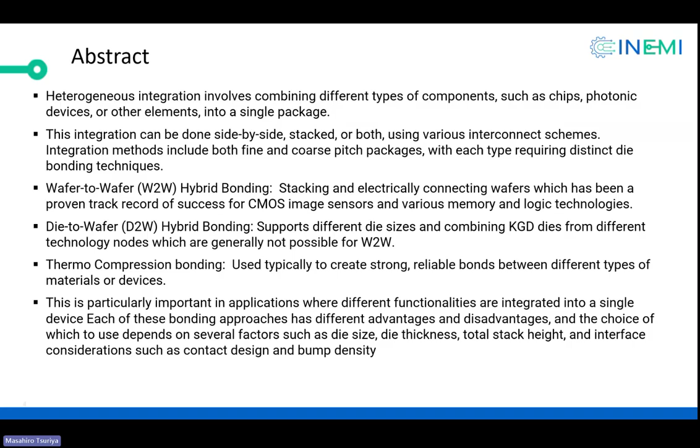Abstract: heterogeneous integration can be achieved through side-by-side, stacked, or hybrid configurations utilizing various interconnect schemes. This method encompasses both fine and coarse pitch packages, each requiring specific die bonding techniques, including wafer-to-wafer and die-to-wafer thermal compression bonding. This topic is particularly relevant for applications that integrate multiple functionalities into a single device. Here we discuss these bonding techniques, highlighting the advantages, disadvantages, and the factors influencing the choice of method.

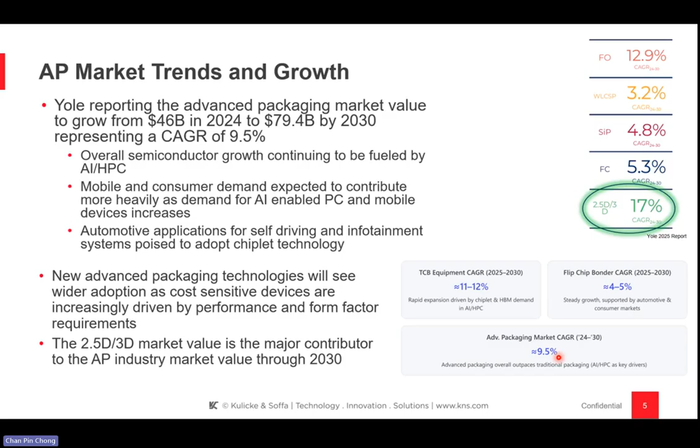There's big growth in 2.5D and 3D packaging, close to 17%. Let's focus on the bottom right, the TCB equipment, thermal compression bonding. Remember, today's topic is about bonding. It's growing at a CAGR of about 11 to 12% between this year and 2030. Flip chip bonding with mass reflow is growing about 4 to 5%. Overall, averaging the three segments of the market including hybrid bonding, it's growing at close to 10%, about 9.5%. Let's talk about the three major bonding technologies.

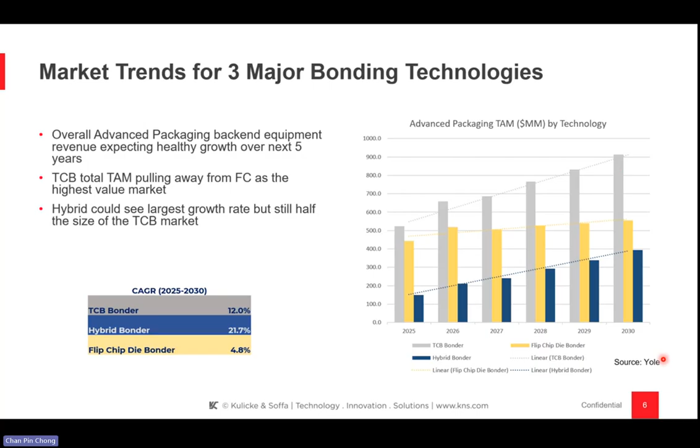Let's talk about the transition of technologies from flip chip to TCB. Thermal compression bonding and flip chip bonding are both very critical to die attach technology in semiconductor packaging. Flip chip, while still indispensable for many mainstream, cost-sensitive applications, is a very mature technology that's also plateauing. However, TCB right now is riding on the AI HPC, high performance computing market segment.

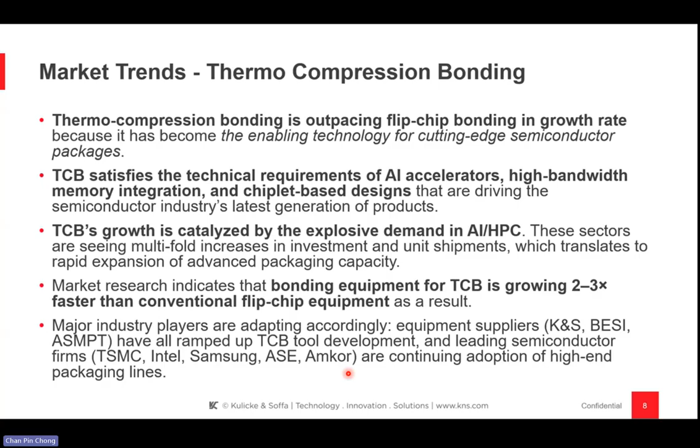So the major equipment suppliers, K&S, BESI, and ASMPT, have all ramped up their TCB development, and leading semiconductor firms like TSMC, Intel, Samsung, ASE, Amkor—just to name a few—are all adopting thermal compression bonding as the requirements for AI and HPC continue to grow.

Okay, so then we talk about the next phase of hybrid bonding. Hybrid bonding and thermal compression represent two generations of advanced die attach technologies. Hybrid bonding achieves bumpless connections - there's no bumps. It's direct copper to copper at sub 10 micron pitches.

But some of this could have been challenges if TCB continues to get smaller pitches, and hybrid bonding could be focusing on even finer pitches like sub 5 microns. This enables ultra high interconnect density for 3D integrated chips. TCB typically uses solder or copper microbumps with heat and pressure - the key thing here is heat and pressure.

Reliably bonding dies at fine pitch - today the market is around 20 to 40 microns pitch with high yields, while hybrid bonding is viewed as a longer-term solution for higher density and even finer pitch for heterogeneous integration. But there are also other challenges with hybrid bonding, which I will explain a little later. Hybrid bonding tools have also a smaller market right now, but it's growing very fast, from 152 million, growing at close to a 20% CAGR rate.

TCB, thermal compression bonding, is the workhorse of the current generation, and advances in TCB technology such as fluxless bonding and even direct copper-to-copper bonding is now suggesting pitch capability down to 10 microns, thus potentially extending TCB applications typically reserved for hybrid bond.

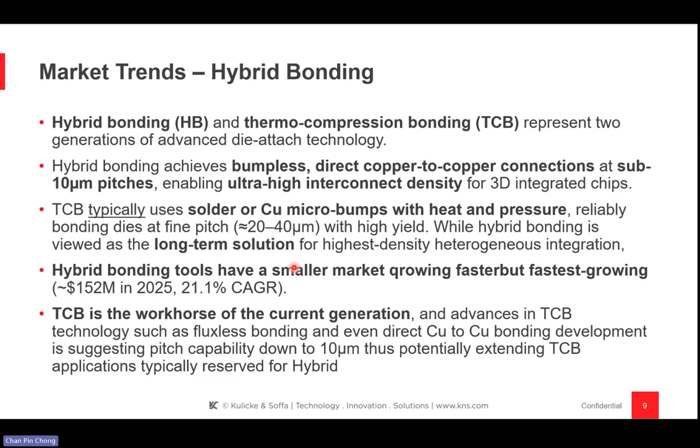So we would discuss some of this in the subsequent slides between the difference between hybrid bonding versus thermal compression bonding, because thermal compression bonding is the workhorse right now for most devices at 20 to 40 microns. As the pitch gets down to sub 10 microns, there'll be a mix between TCB versus hybrid bonding, depending on the package type, package density, package height, and a lot of different applications.

Hybrid bonding has higher interconnect density, allowing interconnections under 10 microns, improving speed and reducing latencies. It has better electrical performance since we're eliminating the solder, making it a direct copper bond, which lowers the resistance and power use and speeds up data transfer - so speed, power, and lower resistance.

It improves overall thermal management, eliminating bulky materials and enhancing heat dissipation for higher power usages. It's true 3D integration and enables real 3D stacking, saving space and improving performance. As package and dies get thinner, and packages stack up more, scalability is very key - that's why it supports various chip types and processes, ideal for modular chiplet designs.

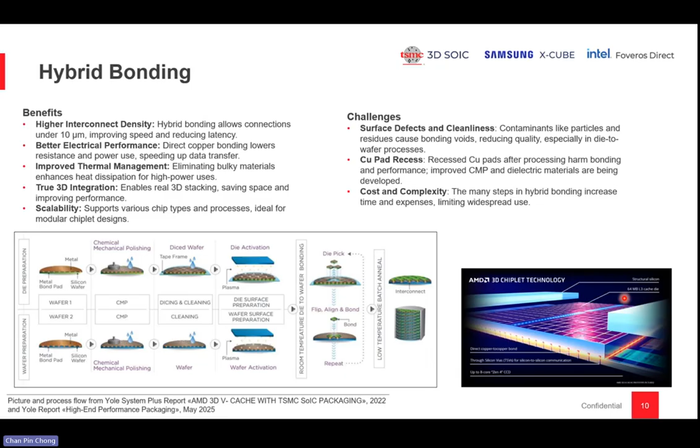Whereas in the OSAT environment, where you're taking in different die sources, dielets, or chiplets from different sources, there's a lot of unknowns because you don't have control of the upstream wafer process. Things are improving, but there are still integration challenges the OSATs or back-end advanced packaging facilities need to deal with for incoming dielets or chiplets from different sources, especially with heterogeneous integration combining multiple chip packages in a single package during die-to-wafer bonding. This is a picture from one of the AMD slides shown at some conferences.

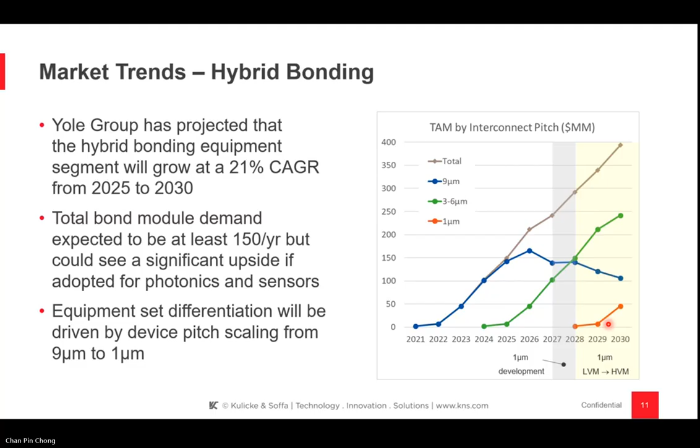Now we move back to the TCB fluxless capability. K&S has developed a fluxless, in situ formic acid thermal compression bonding process. We have over 200 advanced packaging tools delivered, with over 50 equipped with formic acid fluxless capability in high volume manufacturing.

Formic acid fluxless capability is fully developed in-house by K&S and is the only mass production fluxless TCB in production globally today. The major advantage over alternative technologies is in situ oxide removal, which removes the risk of reoxidation. Being in situ means that as you bond, formic acid is introduced, so you're cleaning and bonding at the same time to reduce reoxidation risk, especially on the copper surface. There's no damage to the sensitive device since it's a chemical cleaning process. Formic acid has been used in the industry for many years as a known cleaning process, and we're introducing it as an in situ formic acid TCB flow.

This creates a wide process window, as we can see that quite a lot of equipment is already in high volume manufacturing production. We've done this over the last couple of years working with different customers, and this is a proven technology in production.

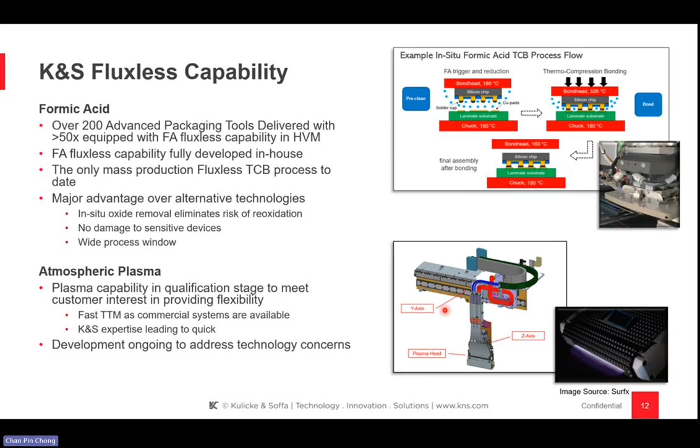Of course, every integration has challenges. As we introduce this technology, we continue to address technology concerns. But this is already in production and in different stages of qualification, and we believe qualification of plasma and formic acid in production will be completed very quickly.

When we introduce formic acid, we believe we have a wide process window. When we introduce hydrogen-based plasma, it effectively removes some of the tin oxide from the tin surface. With the addition of both formic acid vapor and plasma, it clears the top layer, letting the formic acid remove deeper oxide. Formic acid vapor overcomes some of the plasma's directional limits, cleaning hard-to-reach areas. That's why we believe the two are complementary - combining plasma scans with shorter formic acid exposure gives a very nice clean bond. This sequence also reduces formate byproducts and prevents voids in the solder.

Here it shows a formic acid exposure process with an 11-second formic acid exposure, and we measure the bond force after the melt.

Okay, this is about negative 2.1. So the lower it is, the better.

For the plasma-only process, you have a 3.1 second plasma exposure on both the source as well as the target wafer, and here it's about 0.2 newtons.

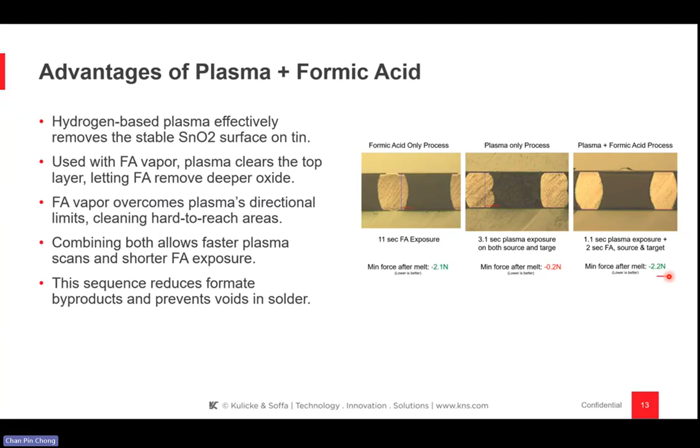If you look at the combination of both plasma and formic acid process, it reduces from 11 seconds or 3.1 seconds to a 1.1 second plasma exposure and a 2-second formic acid exposure for both source and target, creating close to a 3.1 second total exposure time for both plasma and formic acid, and also a good force after melt at 2.2 newtons. So these are some of the experiments showing the complementary effect of plasma and formic acid in the fluxless bonding process.

All right, so let's talk about the KNS technology roadmap.

Chanpin, just to let you know, Professor Iyer is online now. Oh, thank you, I was trying to text him while talking. All right, so you got him. Thank you, Subu, thanks for joining. No, I was unable to get my mic to work when you were trying to introduce me, but that's okay. Everything's good. Okay, good, thank you. All right, a couple more slides and it'll be your turn.

All right, so KNS technology roadmap, large format. You can go to YouTube, Google, all kinds of co-pilots, and see CoWoS capability scaling: large chiplets surrounded by HBM memory dies, and you can see these modules are getting bigger.

So KNS is basically aligning our roadmaps to CoWoS and EMIB scalability to large format. Large format could be large die or large substrates, going up to about 150 millimeter interposer packages on substrates, to meet the bonding needs for both RDL panels and quarter panels. 310 by 310 looks like the most imminent one coming up soon, and of course going even bigger as the scalability of the roadmap increases for AI and HPC computing.

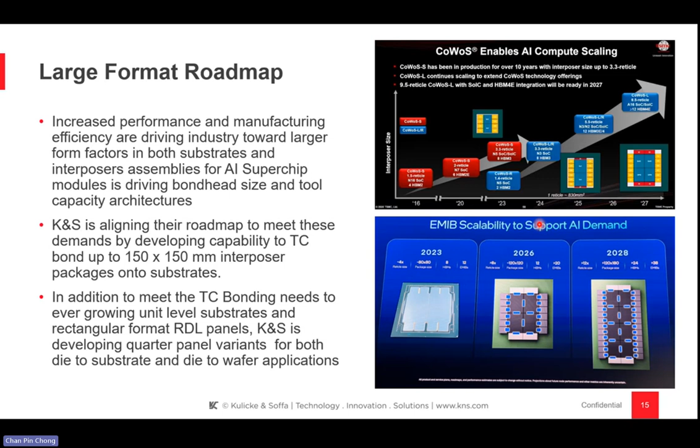So people are moving towards a panel, and I think the first step will be a quarter size panel, followed by the larger panel later on in later years. But KNS is focused on addressing those roadmaps in both the CoWoS and EMIB scalability.

Let's talk a quick few slides on copper, and then I'll introduce Professor Subu. This is an alternative to hybrid bonding. I mentioned a lot about the 10-micron node where people are adopting hybrid bonding, but KNS has also developed a capability using fluxless copper-to-copper TCB. It's the same equipment set, with formic acid delivery hardware used for solder extended to solderless copper-to-copper. Discussions will cover copper-to-copper TCB surface prep, process options and examples.

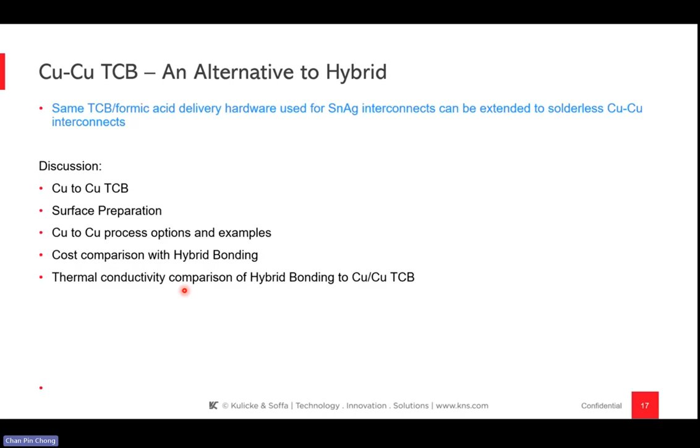And then, of course, we have cost comparisons with hybrid bonding. It's a much more competitive solution, and you can continue to push the scalability of the node down to sub 10 microns. Professor Subu will talk about some of that. We also have a thermal conductivity comparison of hybrid bonding to copper-to-copper TCB.

So the prep: CMP. Here basically you have a copper pillar, 1 to 100 nanometer range, with copper oxide layers. You apply force and heat to create a flat surface and initiate diffusion. So the way it bonds is basically diffusion, with temperature and force, about 50 megapascals. And you can see the deformations and the copper oxide reduction.

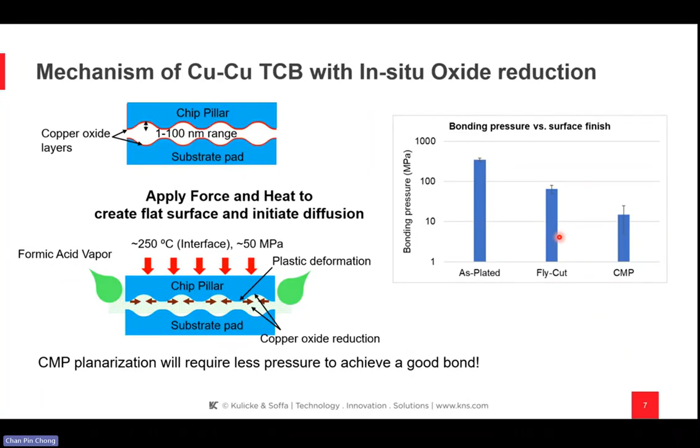And of course, when you do a CMP planarization, it creates a much flatter surface, and the bonding pressure is lesser here, about 10 megapascals compared to as-plated versus fly-cut. So the CMP process is recommended to get towards a flatter surface, and then you can apply heat and force where diffusion happens between the two copper surfaces. We have done a couple of different approaches to this, and Professor Subu will talk about how we do the copper pillar with the ALD passivation.

You can see a little bit of protrusion here. All right, here we have a pre-applied underfill organic, in collaboration with Resonac. We have a tool in the US joint facility working on these collaborations on the pre-applied underfill organic materials. And we also have customers in Asia using an inorganic dielectric bonding.

You can see the whole process between the ALD passivations with the pre-applied organic underfill versus the inorganic dielectric. And here, when the cooling happens, you can see where the diffusion of the copper-to-copper interface happens, right? This one has an underfill material, and this is basically an ALD passivation.

And this is in collaboration with UCLA. We have our tools in UCLA working closely with Professor Subu and his team. We've got great work, great results coming up. And we've been presenting this in ECTC conferences, as well as the IMAPS conference actually happening today in San Diego.

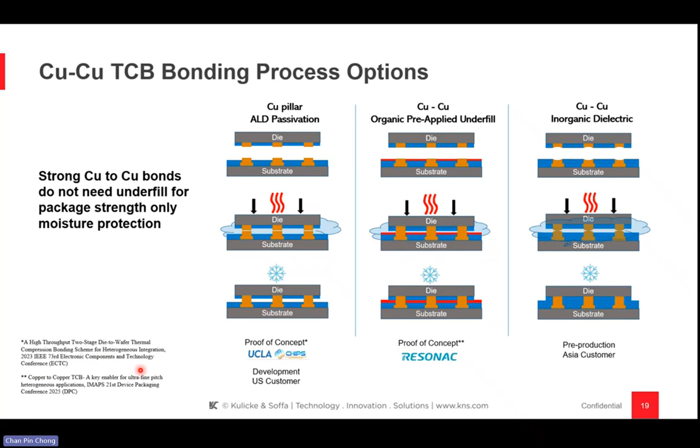All right, so this is the pre-apply. I'll explain a little bit about this pre-apply underfill. This is basically the Resonac process, a spin-coated application process. It's a bump wafer: you apply a resin and partially cure it, CMP process, and then you dice it.

The die size here is about 5 millimeters, 20 micron pitch, copper pillar height about 5 microns, and then we have a 0.5 nanometer CMP after finish. We apply an underfill thickness of about 4 microns, and then we do a little bit of a protrusion of 30 nanometers, and then we anneal for about 2 hours at 250 after bonding.

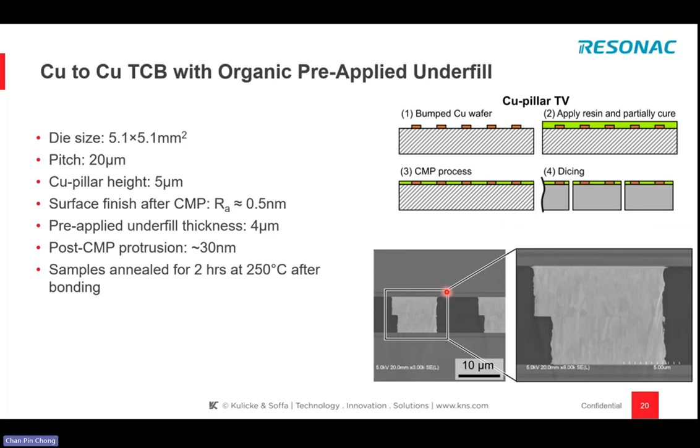So this is one of the methods which I mentioned - this is method number 2. And this is what we've done. And here you can see that after the anneal process, pillars show grain growth, okay? And the wavy surface is a good confirmation of the good joint between the two surfaces of copper. There's no signs of any degradation after the annealing.

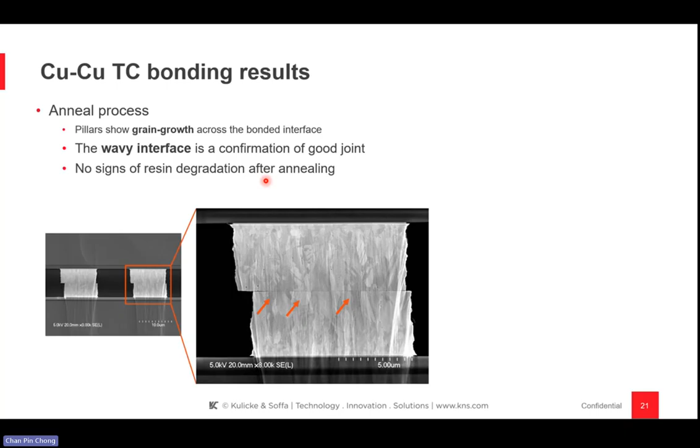So this experiment works quite well, and we'll continue to do more DOE experiments on getting a better process window on that. Okay, so in summary, I'd like to mention that the AP/HI growth in advanced packaging is really experiencing rapid expansion, propelled by AI, HPC, 5G, 6G, automotive, IoT, growing approximately 10% and reaching about 79 billion by 2030.

Bonding technologies - thermal compression bonding is surpassing flip chip bonding in adoption, due to the compatibility with applications of AI, HPC, and chiplet architectures. While hybrid bonding provides high density, it involves much greater complexity, like I mentioned. Today it's a much smaller market, more niche, but it is growing, especially as the node

gets to smaller pitch. KNS solutions - KNS TCB supports the sub-40 micron pitch processes, demonstrating maturity for the tin and copper bonding in high volume scenarios.

And then we are also in mass production on the fluxless process in different sites globally, utilizing the formic acid process. This is a big enabler to the robust packaging solutions for larger die sizes, exceeding the reticle sizes, like I showed you in the roadmap for both CoWoS and EMIB growing. And today the pitches are about less than 20 microns, and we believe we can scale down even sub-10 microns with the TCB fluxless formic acid process.

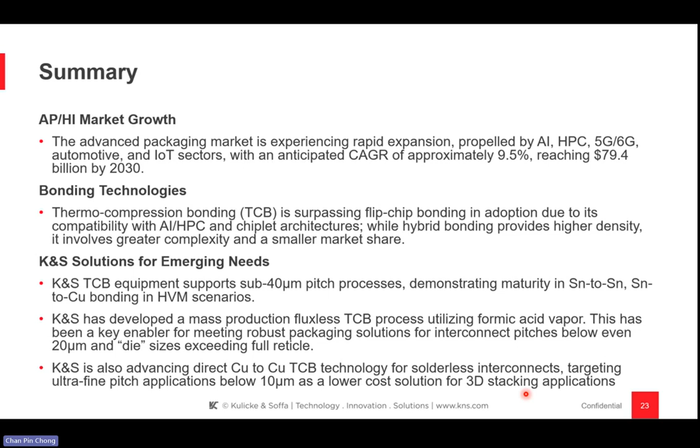And this nicely leads to Professor Subbu's introduction of thermal compression for chiplet-based systems. I hand the time over to you, Professor Subbu, and thank you for good years of cooperation working with you at UCLA labs, and we look forward to even more collaboration as we continue to scale our TCB to finer nodes.

Thank you, Chan Pin. I'll tell you to advance the slides since I think you're still controlling them, right? Correct, so let's go to the next chart.

First of all, we're very grateful for this long-term, sustained, deep collaboration with KNS. I think we benefited a lot, and I believe the industry will benefit tremendously from this collaboration. As Chan Pin mentioned, TCB is the workhorse for chiplet and dielet assembly today, representing the largest incumbent base of advanced packaging assembly. All CoWoS, all 3D stacked memory, HBM, HMC, and EMIB employ solder-based thermal compression bonding almost exclusively, and yields well in high volume manufacturing down to 36 micron bond pitch for both interposers and 3D stacking.

Now, extending TCB to finer pitches requires the elimination of solder to avoid complete intermetallic formation and the problem of solder extrusion, which leads to shorting and other reliability issues as you try to make the pitch shorter. So the key thing is to see how we can eliminate solder and do copper-to-copper bonding.

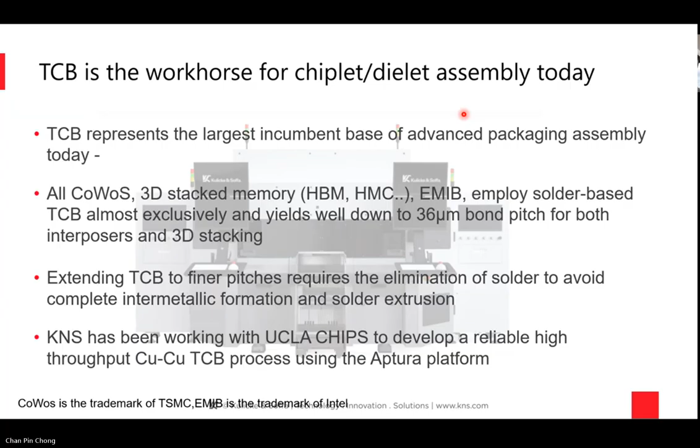We've been working with KNS to develop a reliable, high throughput copper-to-copper TCB process. We started with what's called the Apama platform, and now we're moving over to the Aptura platform, their latest technology, which you can see in the background there. We just took delivery of an Aptura machine, which will be fantastic. We also offer this as an application service for people interested in making copper-to-copper TCB.

Yeah, so why don't we just skip the animations? Otherwise we'll go back.

So the problems of fine pitch solder are bridging and brittle intermetallic. If you reduce the amount of solder, you won't have these extrusions, shown in the left-hand micrograph there. But what happens when you reduce the amount is all the solder gets converted to intermetallic. This intermetallic is extremely brittle, and it reaches the point where the bonds are not very reliable. So the whole idea is how do we eliminate solder completely?

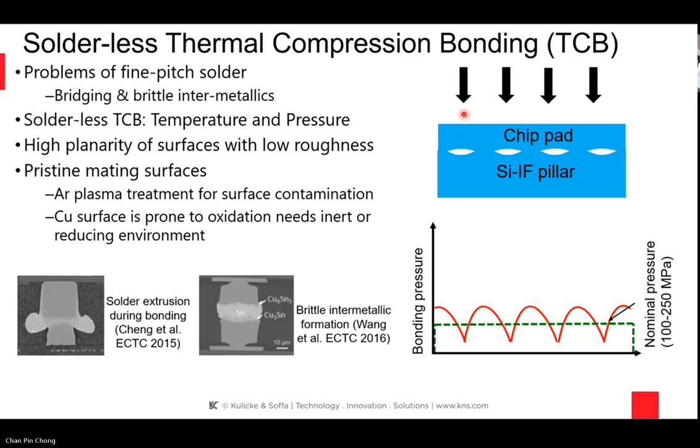As Chan Pin mentioned, you need high planarity surfaces with low roughness and pristine mating surfaces, which we achieve either through argon plasma treatment to remove surface contamination, or more recently with hydrogen plasma treatment to reduce surface contamination. The point is the surface is prone to oxidation and needs an inert or reducing environment. So as you apply pressure, these surface asperities are reduced.

We've done very systematic studies on understanding the effect of pressure and temperature. The principle is actually simple: when you apply pressure to a rough metal surface, you flatten that surface at the atomic level. When you apply pressure and temperature as shown here, you're able to achieve very good surfaces across the area of the dielet, shown on top, to be reasonably good, so that any protruding surface asperities get flattened completely.

We also have temperature-induced grain growth across the bond line, which ensures good bond. This work was done on both gold surfaces and copper surfaces. Gold bonds at a slightly lower temperature because it's a softer material than copper, which helps a little. For most of the 3-5 materials we do, we use thermal compression with gold, but for silicon-based materials, we do it with copper.

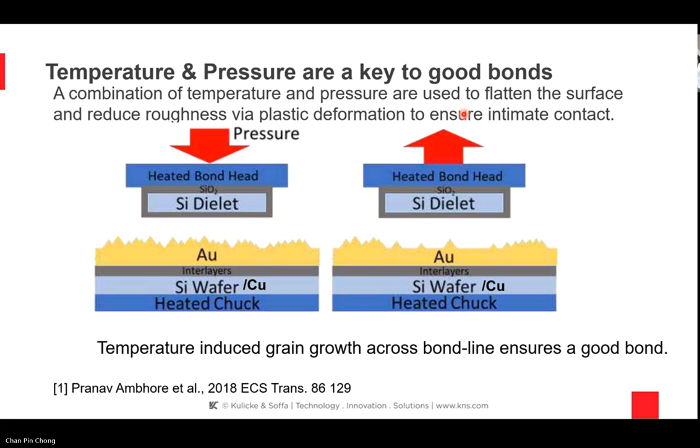We need to figure out how to align at lower temperatures so we can get better overlay tolerance. So what we've been developing at UCLA using the APAMA platform is a two-step process, which separates the placement process and the grain growth process.

In step one, the dielet placement includes the alignment, the cleaning, and the tacking. That is done at a lower temperature than the temperature at which we would tack the surface—around 120 degrees Celsius. Let's go to the next chart.

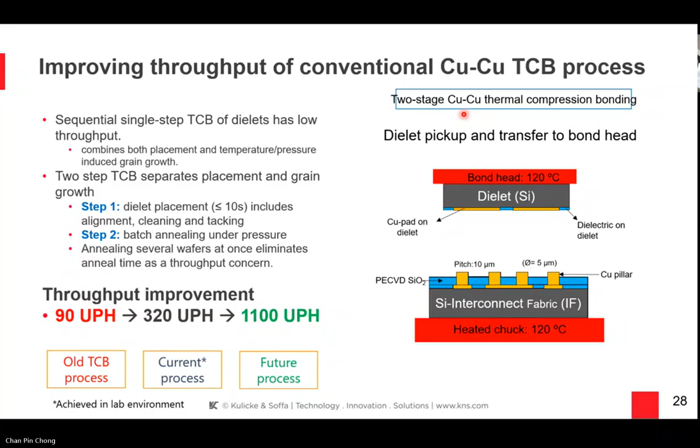Here is where we actually introduce the formic acid. The formic acid will then reduce the surface oxide completely, and then we do an alignment step, a second order alignment. Then we actually bring the die down and quickly heat it up to about 250 Celsius and apply a bonding pressure of about 50 megapascals.

I use bonding pressure rather than force, because at the end of the day it is the pressure on the individual pillars that actually is important. The force that you have to apply has to be integrated over the pillar area—that is very important.

When we started, we were doing this all in one step, and our throughput was about 90 units per hour. Then we went to this two-step process in the APAMA tool, and we were able to get about 320 units per hour. When we go to the Aptura tool with two heads and so on, we should be able to easily get to greater than 1,000 units per hour.

At about 1,000 units per hour, this becomes a very attractive process for thermal compression bonding. The beauty of thermal compression bonding lies in the fact that it doesn't require the incredible process tolerance that hybrid bonding has. Since there's a tremendous installed base of thermal compression bonders, if we are able to make this possible to get to very fine pitch with process enhancements, then this is the preferred technology for many of the advanced packaging constructs we are talking about.

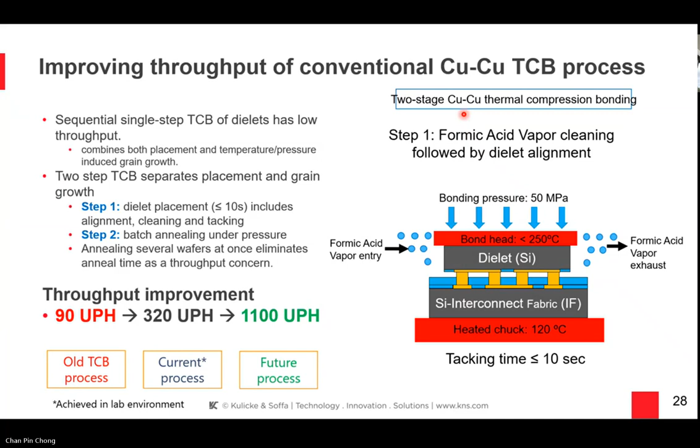I think this process, in our opinion, is a very robust process. We've been able to get routinely 10 micron pitch using the APAMA tool, our last generation tool. With the new Aptura tool, we're expecting to go down to 5 microns with careful work. Today the best we've demonstrated is an 8 micron pitch thermal compression bonding copper to copper. Let's go to the next chart.

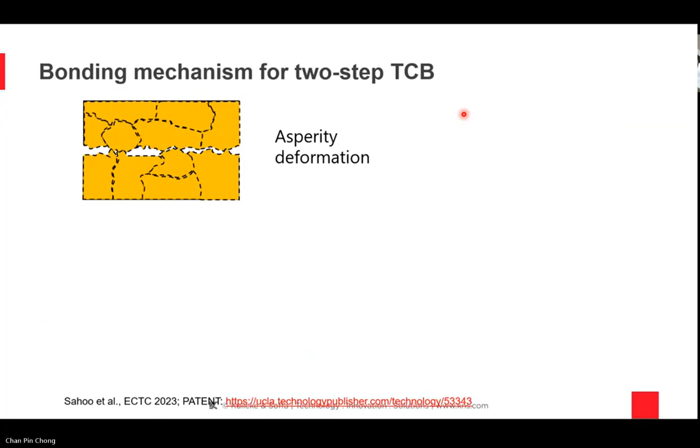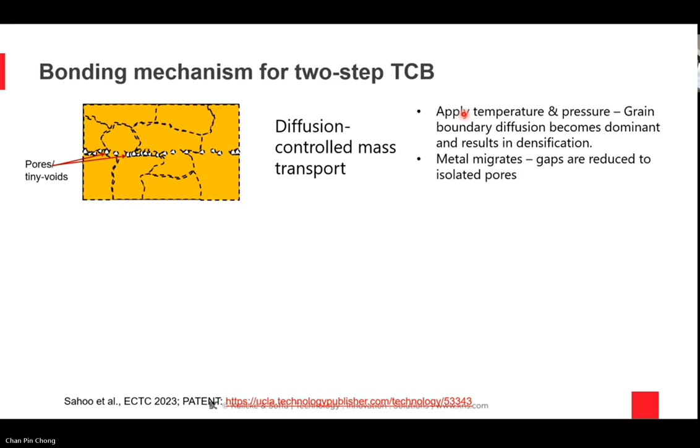What are the bonding mechanisms? When you bring this thing down and make contact, wherever you make contact, with temperature, you create a diffusion controlled mass transport. When you apply pressure and temperature, there's also grain boundary growth. And wherever there is no contact, there'll be a void.

This void process is very similar to what happens in hybrid bonding as well, except the method in which we apply force in TCB is an externally impressed force, while in hybrid bonding it is thermally induced force caused by the expansion of copper. But the fundamental mechanisms are very much the same.

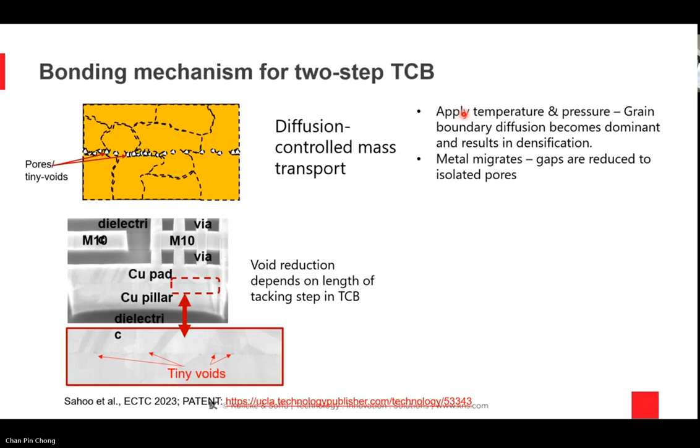So basically you end up with these voids, and these voids then have to disappear, and they disappear by further diffusion. You can get rid of most of these voids. Now, depending on the microstructure of the material—if one material has a higher diffusivity than the other, or there are more grains in one because of differences in texture and so on—the dynamics of the void formation and void migration will actually differ, as shown on the right-hand side.

So you could actually get to the point where these voids are very far away from the interface, and there is no fundamental issue anymore. By the way, if you do this with hybrid bonding, you will see very much the same effect, because at the microscopic level, these two are the same.

The big difference between hybrid and TCB lies in the fact that we are only controlling one thing in TCB, while we have to do two things at the same time in hybrid bonding. We have to do a copper dielectric bond, and then follow it up with a TCB that is thermally induced by expansion of the copper from heating it to high temperatures.

So now, the beauty of this is that the way we do this is we let the pillar protrude slightly, and by slightly, it doesn't have to be a lot. Even a few thousand angstroms of protrusion are adequate. It's whatever you can actually achieve reliably on the surface.

And again, remember that our focus here is on die to silicon substrate bonding, which is going to be the most important type of assembly going forward. So we've actually done lots of reliability studies on this, the temperature, humidity, and so forth, and we don't see any fundamental problem in the reliability of these thermal compression bonds.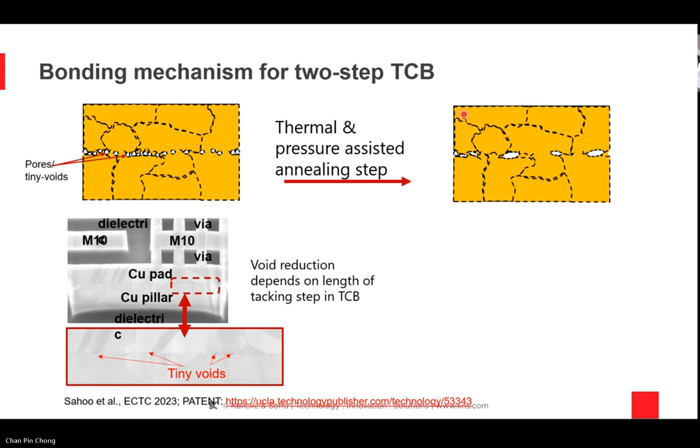And we have done this with commercial chips. We get these chips from TSMC, from Global Foundries, and so on, and there is no issue at all. We're able to get all these different foundries to work pretty much the same way with the same process. There's no customization of the surface and things of that sort that we hear about in hybrid bonding. We can do vanilla dies from anybody and bond them.

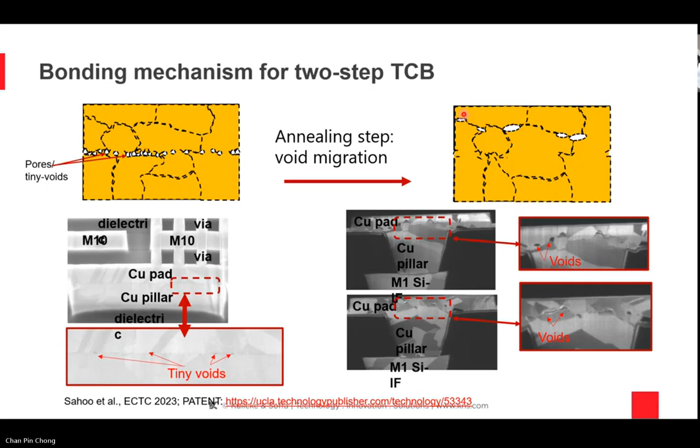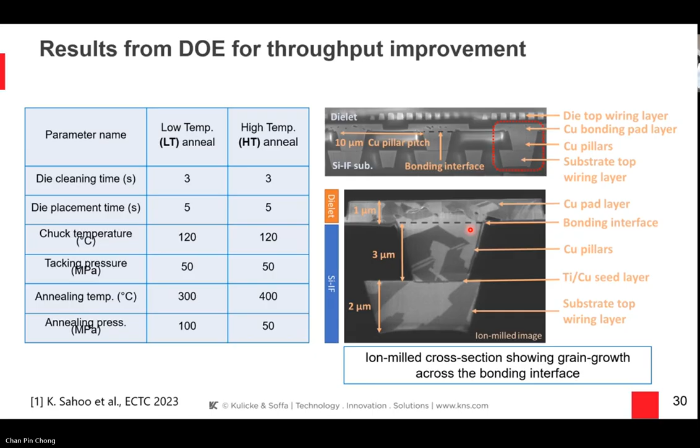And you can see the beautiful grain growth. There's absolutely very little remnants of voids. If you look very carefully, there'll be one or two voids, but they're far away from the interface. And this is a typical sort of cross-section that we get. So if you send us a wafer, we'll bond it for you, and you will get pretty much the same results. Next chart.

And so using this approach, we've been able to successfully demonstrate assemblies on our platform, which we call the silicon interconnect fabric. The silicon interconnect fabric is just a silicon wafer with multiple wiring levels on top, terminated with these copper pillars that I showed you before.

And so we attach these using this process that I just described, and allow us to actually produce these large assemblies.

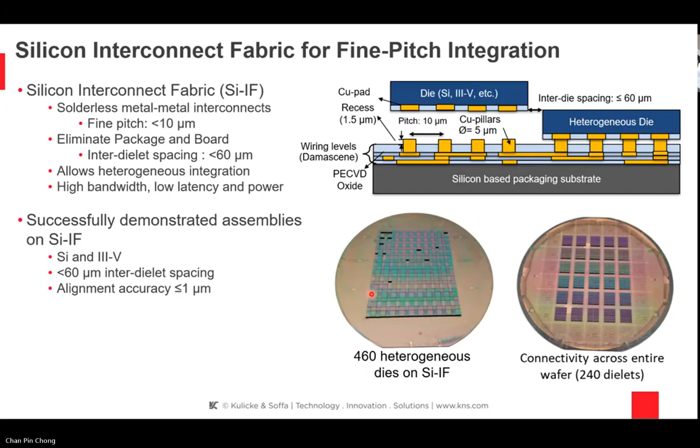We've been able to do dies, both silicon dies and 3-5 dies. The 3-5 dies are mainly for RF applications as well as for power delivery applications with gallium nitride. 60 micron interdielet spacing—we can go as low as 20 microns, with an alignment accuracy of about 1 micron. Today, 10 microns we can do quite well, and we've demonstrated 8 microns, and with the new tool we expect to be able to go to about 5 micron pitch.

Next chart, please. Yeah, and this, go back.

What I really want to emphasize here is, at the university, we don't have a very fancy clean room—it's a university clean room. We are able to prepare these surfaces and bond them with the previous generation APAMA tool and get these kinds of results. What I want to impress upon you is how robust this process is, how well we can do this even in an environment such as ours.

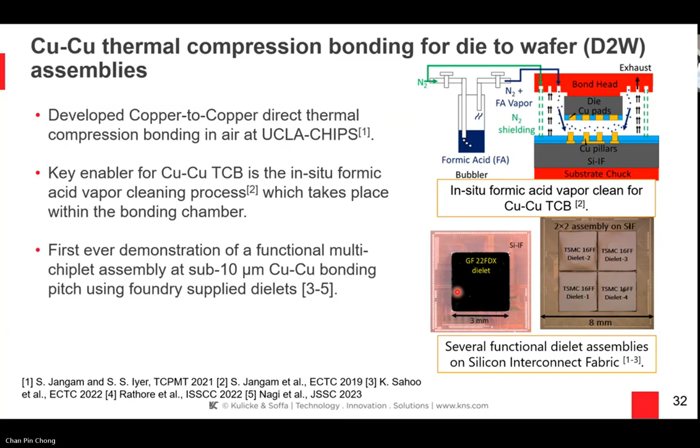If you were in a real fab or a real OSAT with clean areas and all that, I think it'll be a lot easier to pull this off, and I'm confident that will happen. Next chart.

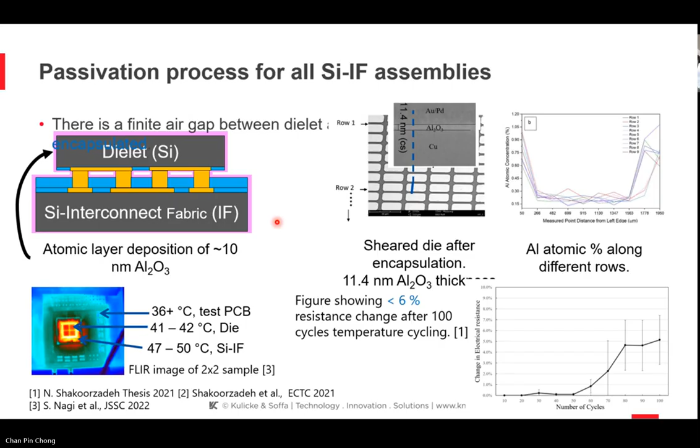I think increasing the throughput for high volume manufacturing is one of our key goals here, because we want to get to the point where this is a very viable manufacturing process, and we're very, very close to actually doing that.

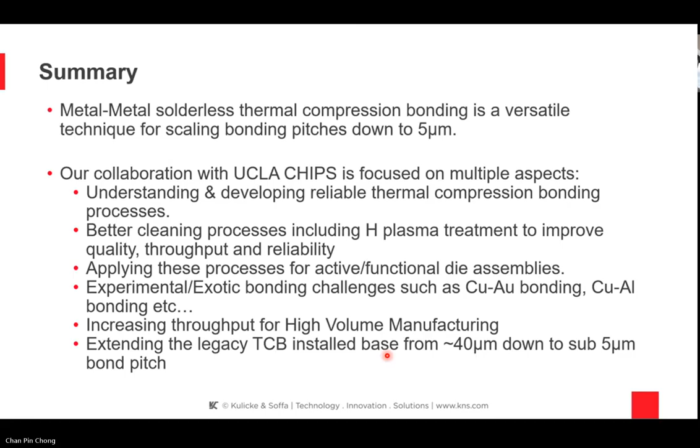Yeah, great. Thank you both very much. Very interesting presentations, and great to see the progress that has been made and the speed at which that progress has been made to drive us down to the higher density feature requirements.

We've got a couple of questions. If we don't have time to answer them, we will share them with Subu and Chanpin and get answers for you directly. But let me address some of them because I know we're running out of time. One of the last questions that came in was any information on the copper to copper thermal compression cost and thermal conductivity comparison versus hybrid bonding.

Chanpin, you want to take the cost, and I'll take the other question, the thermal. Yeah, so we actually did a modeling, okay?

Okay, so there's two costs in any factory or any fab, right? One is CapEx and one is OpEx, okay? CapEx is basically the number of equipments you need to purchase to form the line. As you know, the whole process of hybrid bonding includes CMP, cleaning, activation, hydration, everything, right? So the whole process CapEx is significantly higher. I've heard from customers that quote up to 10x, okay, in terms of CapEx. But again, it varies depending on the process, depending on number of bonding steps and so forth. So that's as big as 10x in terms of difference between hybrid versus TCB bonding.